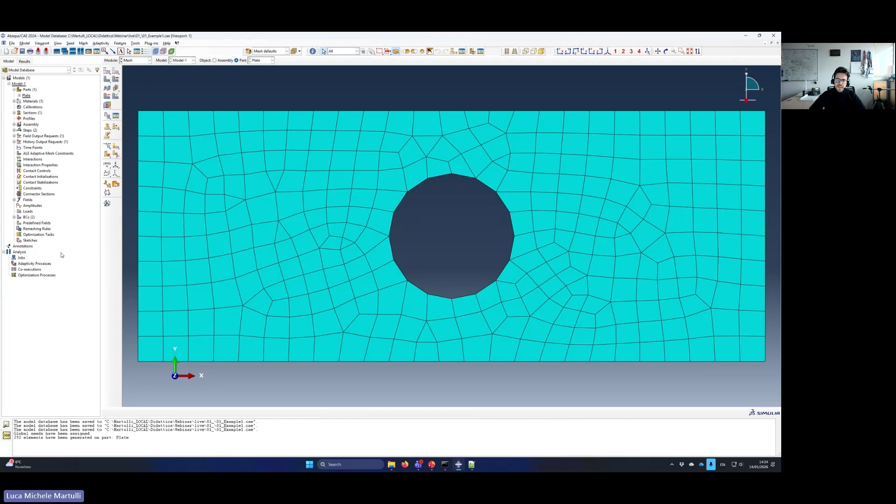Load the mesh. I'm going to use, for example, a 20 millimeters mesh. I'm going to mesh this. This is a horrible mesh, I'm aware of it, but for the sake of this webinar it's okay. Let's just quickly create, exercise, a job, and launch the simulation. Hopefully I didn't forget anything.

We just wait for the simulation to be completed. In the meantime, if you already want to start, if you have questions while I explain, feel free to just write them. Yes, so this is done.

And of course this is an example of results. Again, I will never trust these results because of course the mesh is really terrible here, but again it's just for the sake of this webinar. So let's have a look at what happened here.

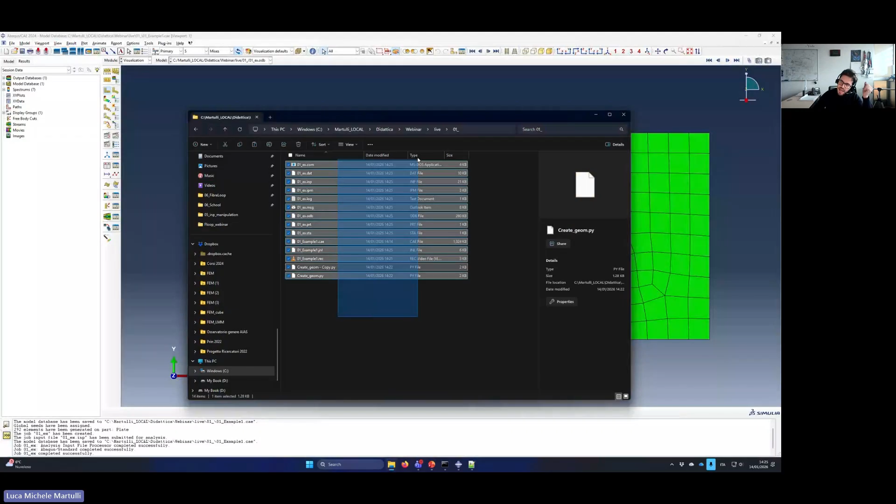Okay, here I have all the files once again. Of course the simulation files this time are quite large, but let's have a look at this new file. Where is it? No, sorry, it's not there yet. So for example, one thing I would like to do is extract the reaction forces along X on the left edge.

So I can do XY data, double click here, ODB field output, continue, unique nodal. I want the reaction force in direction 1 for all the nodes that are on the left. Done, remember, because often I forget. Save as, and then this menu appears. If I sum them, click OK, what I have is basically the trend of the reaction force.

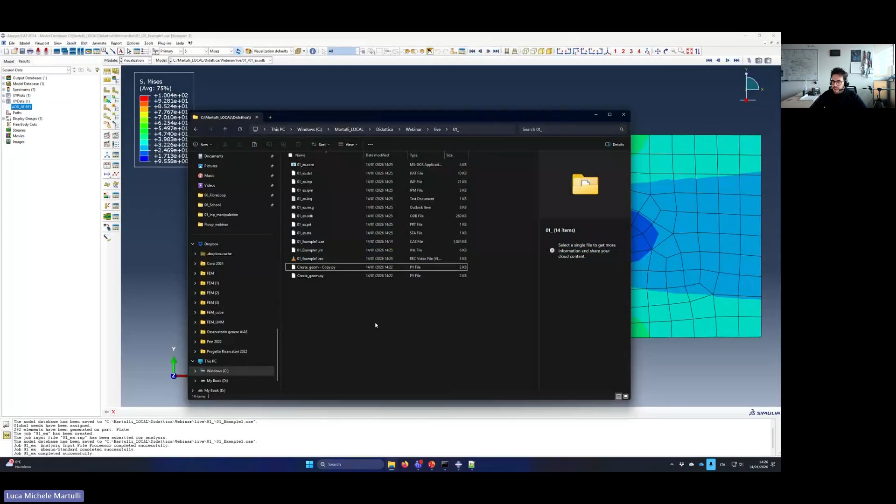Let's have a look at what happened here. So if I open the rec file, no, it's not here. Where is it? There should be...

RPY file. Yes, I'm missing the replay file for some reason. That's strange. Let me save. Oops, sorry. One thing I can do maybe is if I close and open it again. Yeah, RPY. Sometimes Abaqus is just like that.

Okay, so let's have a look at the results. Yes, of course, now I have to do it again, but let's have a look at this new file. This is the replay file. Be careful about this file because, unlike the recovery file, this contains really everything that you did, even change the visualization, for example.

So for example, where is it? Sorry, here. Let's do it again what I did before. Double click on XY data, ODB field output, continue. I want nodal quantities that are reaction forces along 1, so along X. I'm going to select these nodes, done, and then I do save as. This menu appears again, and then sum.

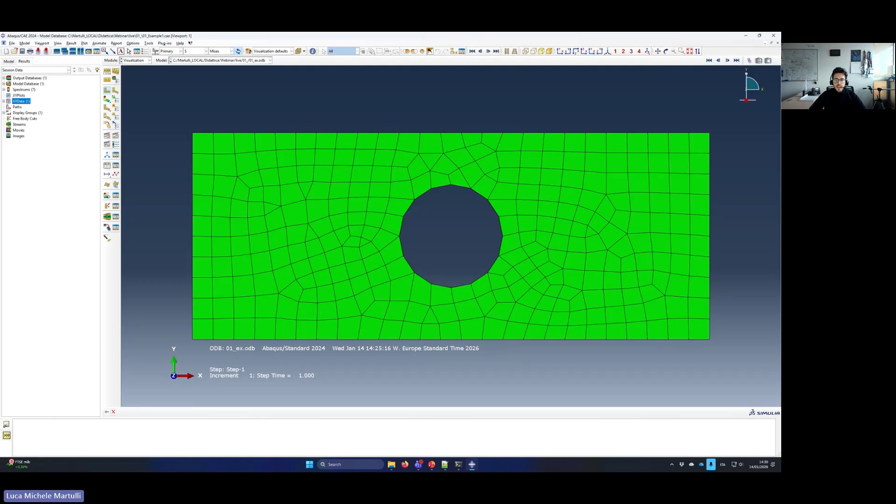Another thing we can do is XY data once again, ODB field output. I can extract the displacement along X of, for example, a single node like this one, because displacement was imposed here. And here we have our

displacement. Let's open again the replay file. Once again, let's copy this. This is just me plotting, double clicking on that and plotting it. So this is just the bits we need. Okay.

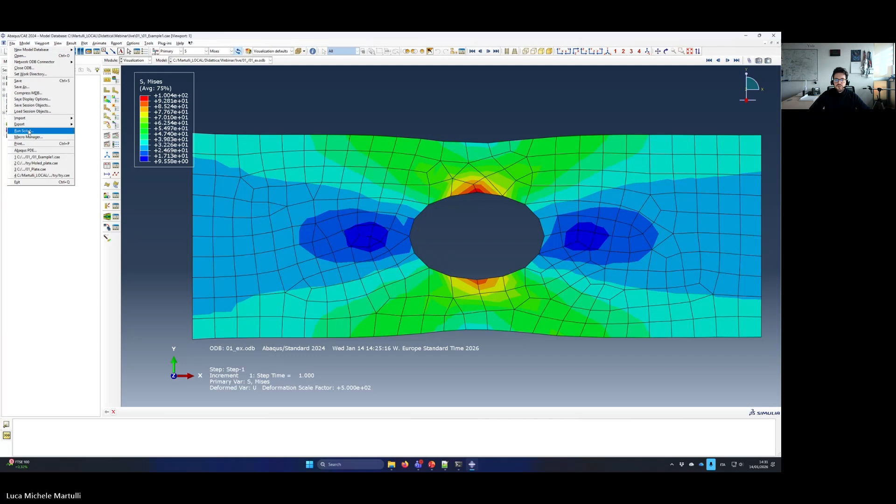And for example, we can already try and do it. So if I delete this and go back here, if I do file, run script from here, output, you see I already have the two data I want. Once again, what is the power in this?

The power in this is that I can say to Abaqus, actually, you know what, the output file I need for now is called 01_ex.ODB. So that basically when you have to open something, you do this, plus the output file.

But maybe next time I want this file, or actually much better it would have been if I have this file, then the next file I want to use is this one, where the diameter is 90 millimeters instead of 100. I keep doing this and repeating this. I have now basically an instruction file that does, with 2 clicks, file run script, what it does with a lot of many clicks of course.

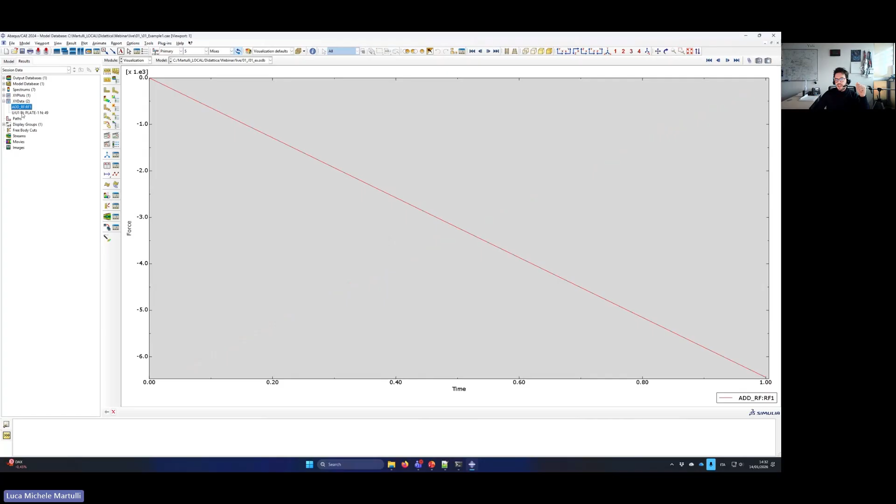So again, I think this is the simpler part of it. Like I said, this is the part of automation of simple tasks. What I've shown you the pre-processing and the post-processing? I think it's quite useful already. But I think the best part starts when you try to automize, to make this much more automated. How can we do it?

I'm going to do this. So I will copy only the CAE and the journal in this folder here. I'm going to close this Abaqus here and open it. Actually, I also need the file we created before, that is this one, create geometry.

Okay, like I mentioned before, actually what I really want is to test different diameter sizes from 10 millimeters to 100 millimeters in steps of 10. So as it is now, I can create 10 copies of this file. No, not this one, the previous one. Let me close a bit, now it's too many things I have open. I can create many copies of this one and just change all these inputs basically.

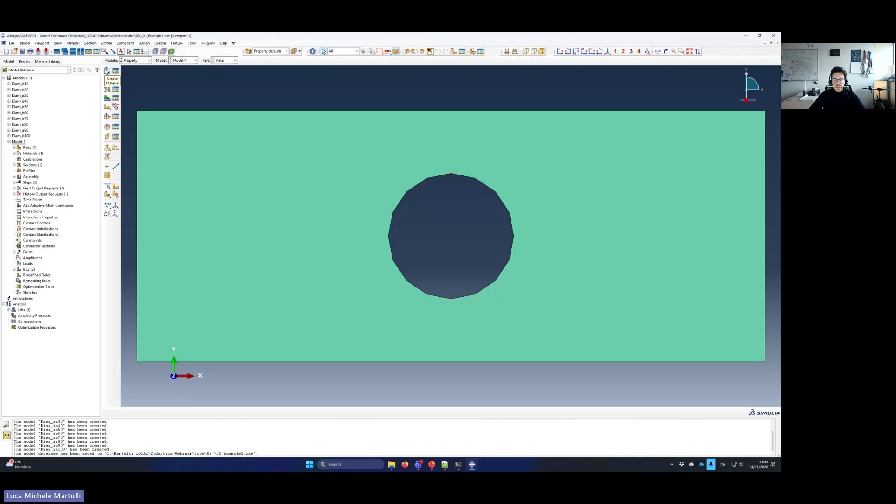Yes, okay, actually here it's done already. Let me delete this material section and the section assignments. Let's do this—wait, I'm going to restart from scratch. Actually, yes, okay. Property, yeah, here, sorry.

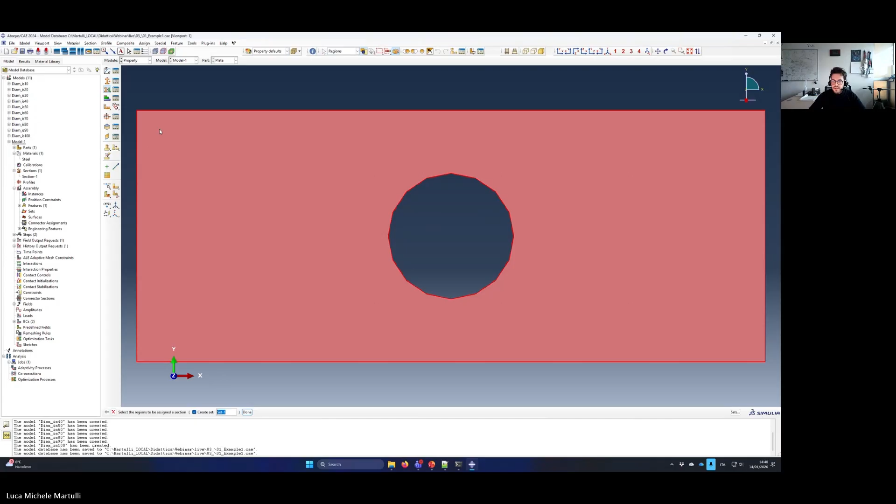And once again, let's open the rec file, and let's add all of this inside the for loop. Always remember it's very useful for your colleagues to comment. This is: create material and section, and assign it.

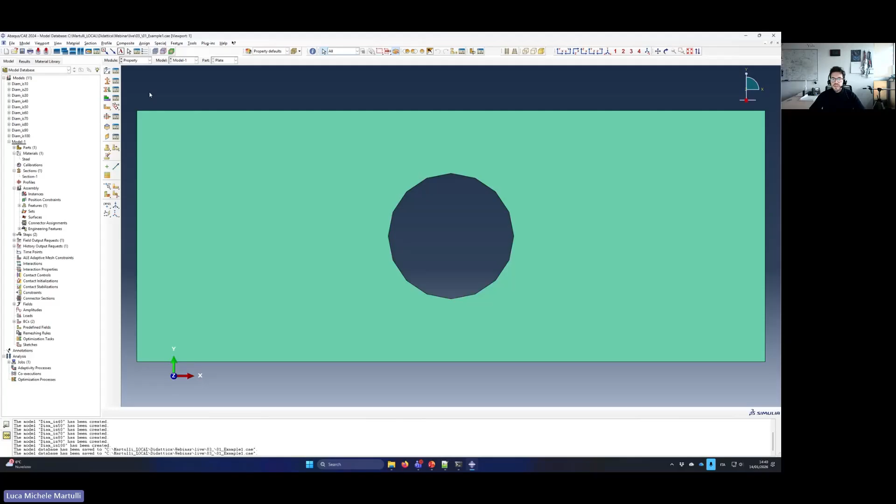And so on, basically, because then what we do is in the assembly, we bring this back. Okay, we open the rec file, and this is the last part—this is the comment assembly line.

That's actually nice. Assembly, the step creation, once again continue. Okay, let's see what we have here. And this is basically it. I'm not going to continue because I guess you got the point.

But what's very interesting, I think, at some point, is that you can even do this. Double click on job for diameter 10. I call this 01, job of diameter 10. And then if I open the recovery file, here it is.

Here is the job creation. Sorry, we need to remember to respect the indentation with Python always. But this is the job creation command for Abaqus. So the model we're going to use—of course, remember to change this into the parameterized model name.

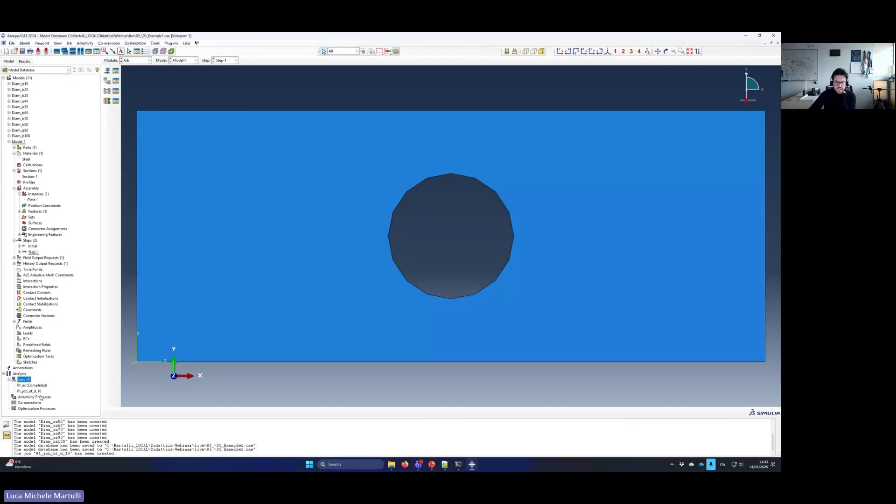This, I think, is already starting to be very useful, because you can imagine, even for what we did before with the visualization—no, I don't have it here because it's the other folder. But with the visualization, we said, okay, let me open it. Now this is a command to do that thing, so I can edit it when I want and launch it every time I need.

Or once again, I can put all of this into a parameterized for loop, to tell Abaqus: look for all the files with the ODB extension and run this command for all of them. Of course, you have to be very careful about the names, because if you call everything, I don't know, displacement 1, then Abaqus will say, okay, I already have it like this. So you have to be careful with the names. But this is very powerful, I think.

And then finally, this is the second part—the second level, I would say, of automation. I think this is already quite useful because level 1 allows you to create tasks, let's say, instruction files that you can launch when you need. But this level 2 is true automation. Basically, this repetitive instruction is inserted in a for loop and launched for all the files, all the simulations, anything you need, basically.

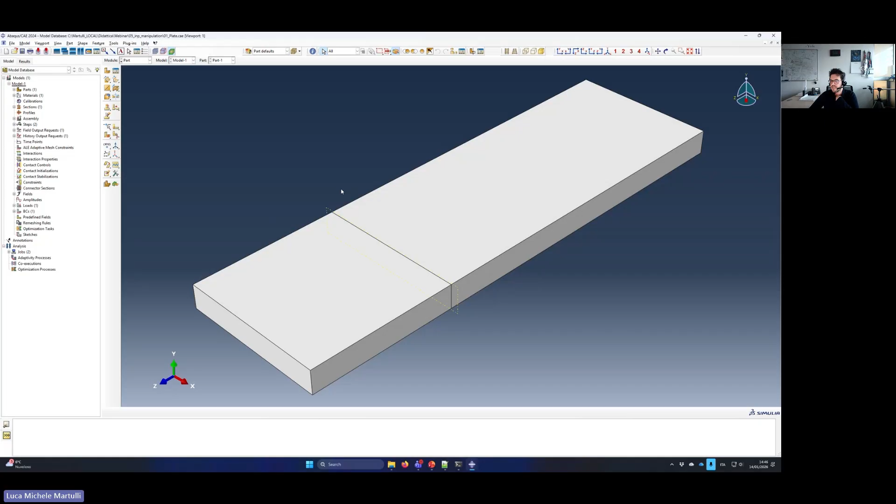It's bent, so here we have an encastre. And here I will show you - in this surface we have a sort of unitary pressure.

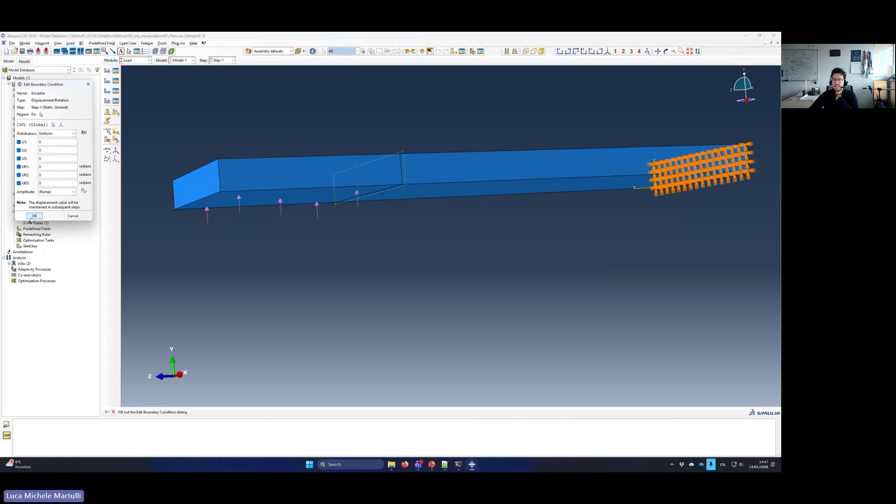Now, the way I defined the encastre is by a set of nodes. What does it mean? Here in the assembly, I can say - you see it, set fix. I defined it, and actually I will do it again: create a set of nodes. Let's call it fix2, for example. Continue.

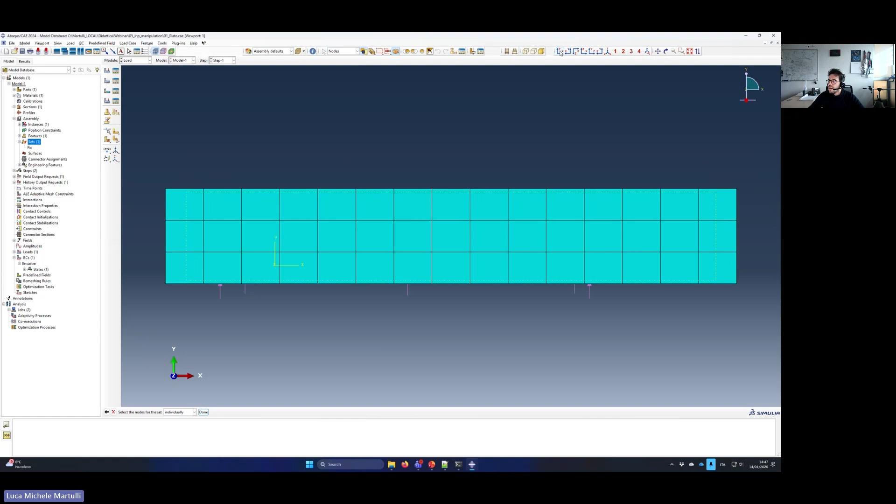Let's just go into one of the useful views. For example, here I can select all these nodes. Done. And now this is the set of all the nodes that I want to be encastered.

In fact, for example, I can do encastre 2. I will not launch the simulation because otherwise it's going to complain. Continue. Here in sets, I can say that I want the boundary condition of encastre applied to all these nodes. Why am I using this now instead of the standard click on the surface?

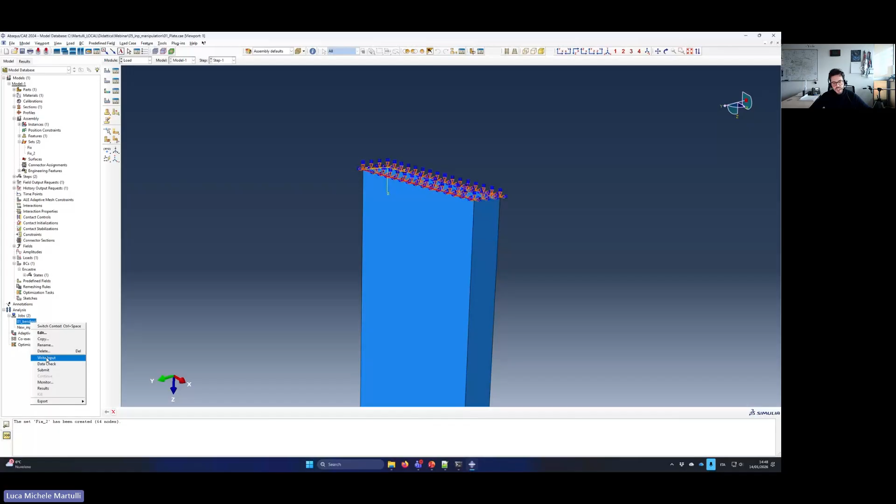Because look at this - I have created a job and I can right click, write input, instead of just launching the simulation. Write input creates this input file without launching it. It just creates the file that you need. Let's open it and see what's inside.

As always, all the nodes, all the elements, and finally I see that the encastre boundary condition is applied to the fix set. And where is the fix set defined? Here - node set called fix, and these are all the nodes that are inside that set.

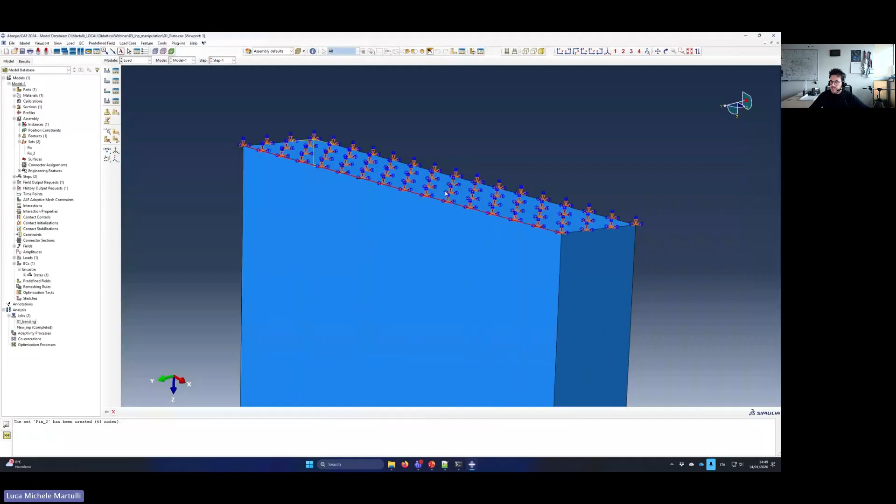Now, let's say that I want to do something, for example. Let's say that instead of these nodes, I want to encaster different nodes. Let's get the mesh back. I want to change the nodes that are encastered. For example, I would like to constrain these nodes, or these nodes.

So what I did - and again, I don't want to do it live because it takes a lot of time - is create a Python code that selects all the nodes with a certain Z coordinate.

I'm going to show this by launching this in Python itself. I'm going to use Spyder. You see I've commented out all the lines related to Abaqus, because of course Python doesn't know them. And what I do - I'm going to launch this. These are just defined functions, so let's keep them for now.

The actual code starts here. Input file, 01_bending. Now I told Python: open this file and read all the lines. I call it 0_input. This contains now all the lines of the input file - basically these are the lines of my input file.

This is very useful. Why? Because then I created - okay, these are the new nodes - and with this function I can read all these nodes and select the ones with a Z coordinate of, for example, 20. For example, this one, and so on and so on.

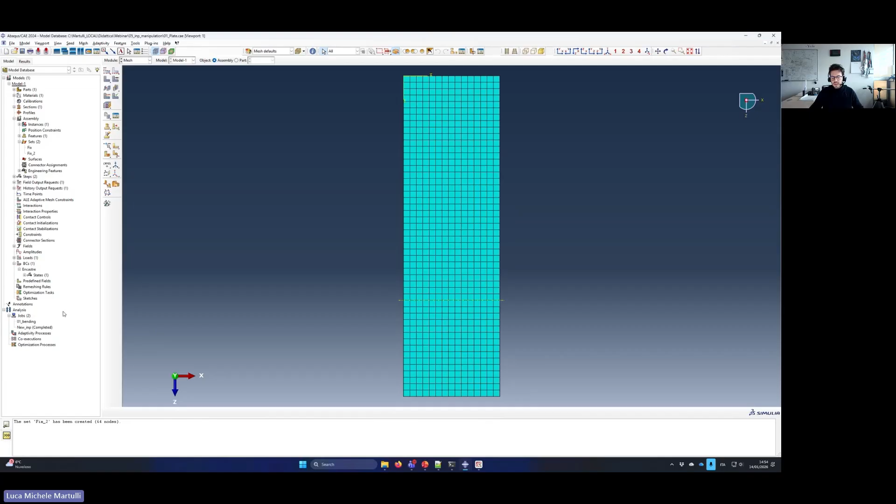What's next to be done? If I go to Abaqus, I miss one command, and the one command that I'm missing is the following: create a new job, not from a model, but from an input file.

Which input file? The new input I just created. Yes, this of course exists, so I'm going to... no, it's -1. It's okay, continue. And then just like before, I open my replay file and I see the command to do what I just did.

This is the input file name, the input that I used to create the new job called like this. And then I can include, sorry, let me open it from here, I can include also submit this job.

And actually, these other 4 lines are lines that tell Abaqus, okay, wait for it to finish. This, honestly, I just found it online to include it in my code. And once again, you understand the power of this: to create an input file, a job based on this input file, and to launch this simulation, waiting for it. This is what we did here.

But actually, if you think about it, what I said before about including all of this in a for loop can be extended to here. So you can include this in a for loop: create a new input file, submit it, wait for it to continue. You can include a post-processing phase in which you extract the results, prepare a new input file based on these results, and launch a new simulation, waiting for its completion, and so on. And this is exactly what we did here.

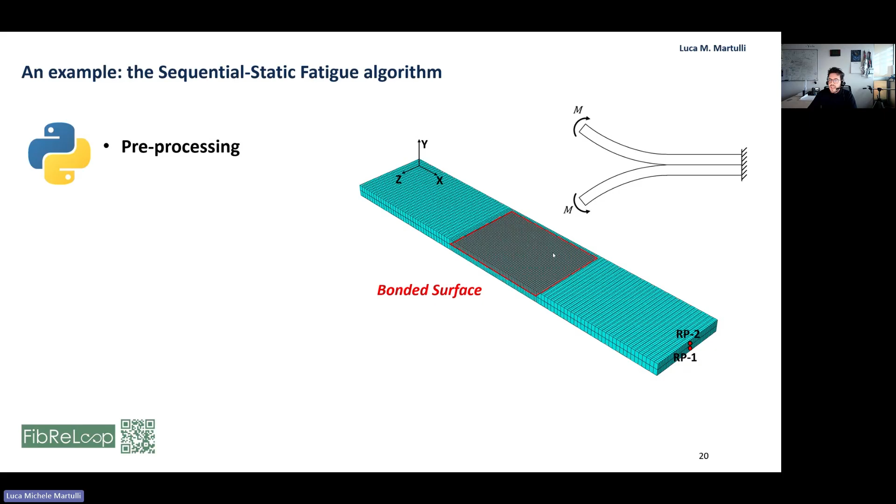With Python, we prepared the geometry and everything, and then we launched a first simulation. Again, this is a fatigue analysis, so we associated this first simulation with a number of cycles equal to 1.

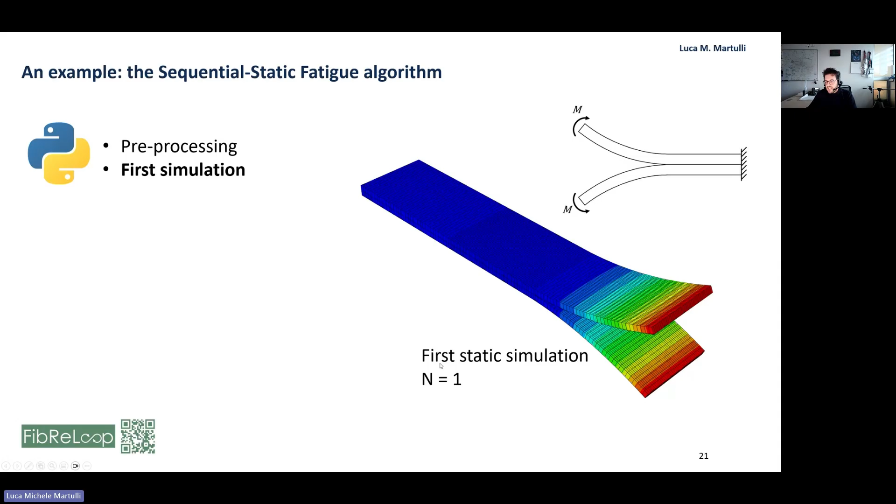For those familiar with crack propagation, you know that Paris law determines the speed of advancement. What we wanted to do is extract the results of the previous simulation, use it inside Python to do some calculation, and then launch the new analysis with the new input file.

associated to a new cycle count and with a new bonded surface. This was easy, and this is why I used the example of the node set, because if you use a technique called virtual crack closure technique, VCCT, you actually have to work with sets of nodes. This was very efficient and very easy to use with Python and input files, playing around with input files in Python.

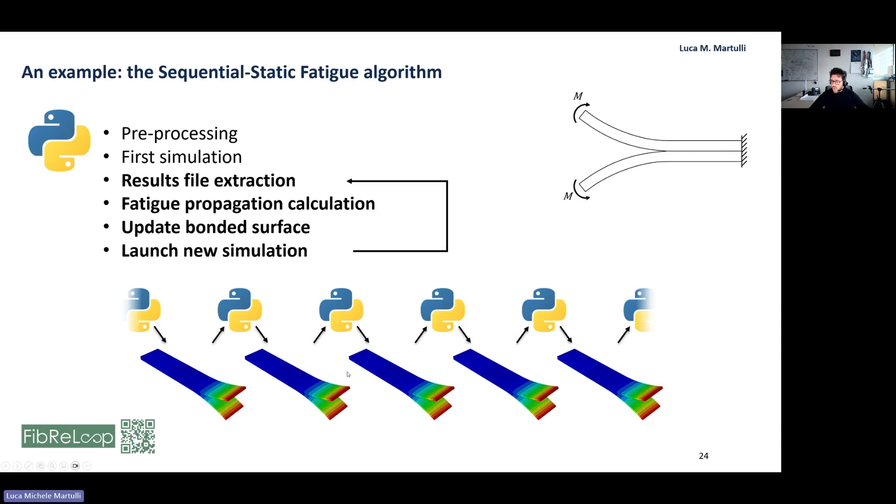You can launch this until you reach the number of cycles requested, or until, for example, all the surfaces have delaminated. We found that this was super easy to implement, especially compared to what was the state of the art back then.

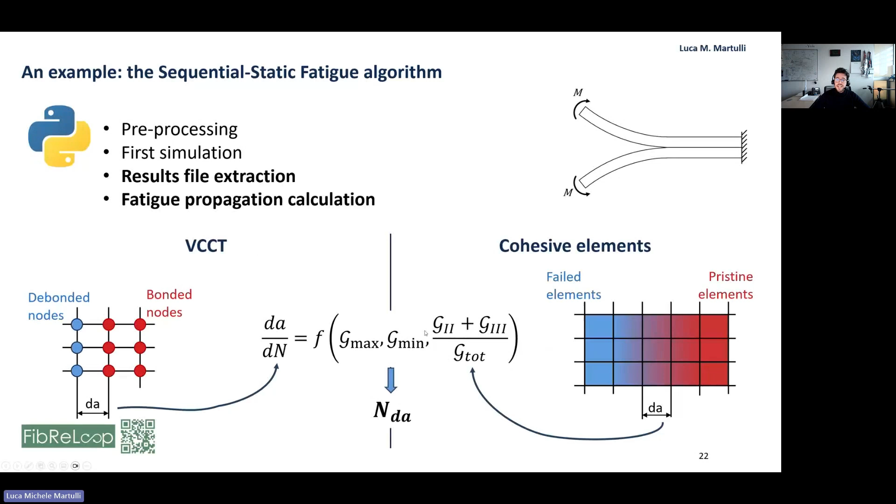I know some of you are familiar with Fortran and subroutines, but I'm pretty sure that those familiar with this are also familiar with how difficult it is even to install and connect Fortran and Abaqus together. It's much more versatile now because the calculation of the speed of propagation is done in Python, not in Abaqus, and then it just becomes addition and subtraction, very easy.

It led to very good accuracy, but this was our main selling point: we had drastically improved computational efficiency with respect to any other method we observed, because instead of launching one single but very complex fatigue simulation, you launch many very easy static simulations.

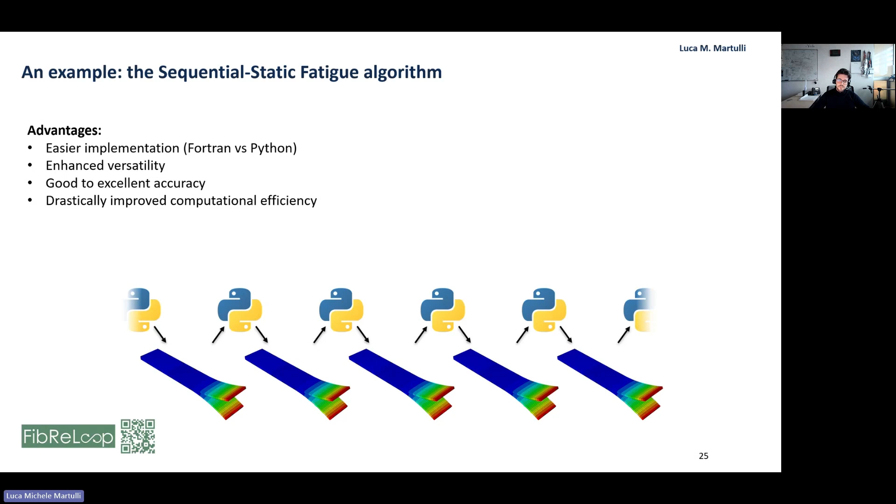By the way, this is an algorithm we developed for fatigue and delamination, but feel free to think about something else, even CFD or something like that. It would be very interesting. I'm specialized in composites, so I don't know other potential application fields, but if you see potential for this idea, I think it's worth exploring, definitely.